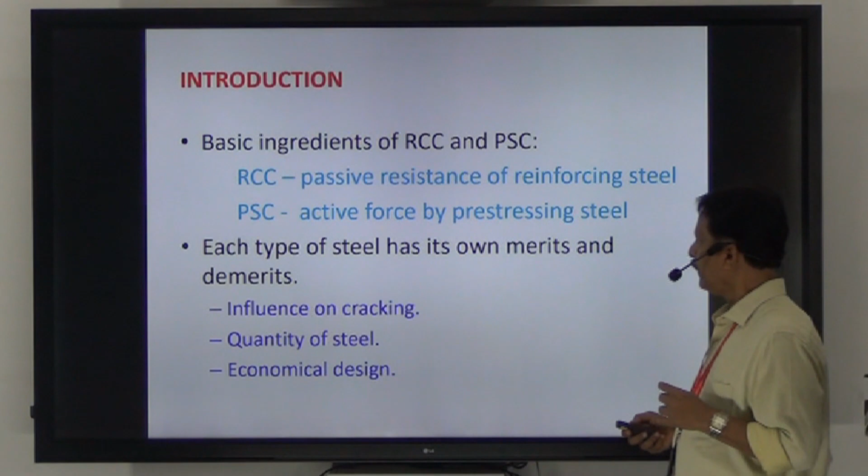Both the steels have their own merits and demerits. The untensioned steel used in RCC is a passive reinforcement.

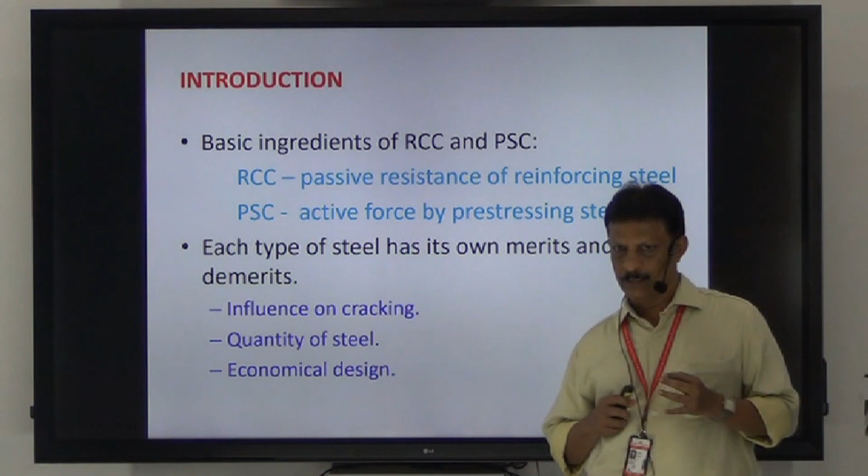Why is it passive? Because that reinforcement in RCC comes into picture only after the cracking of concrete. Till then, it is actually sleeping.

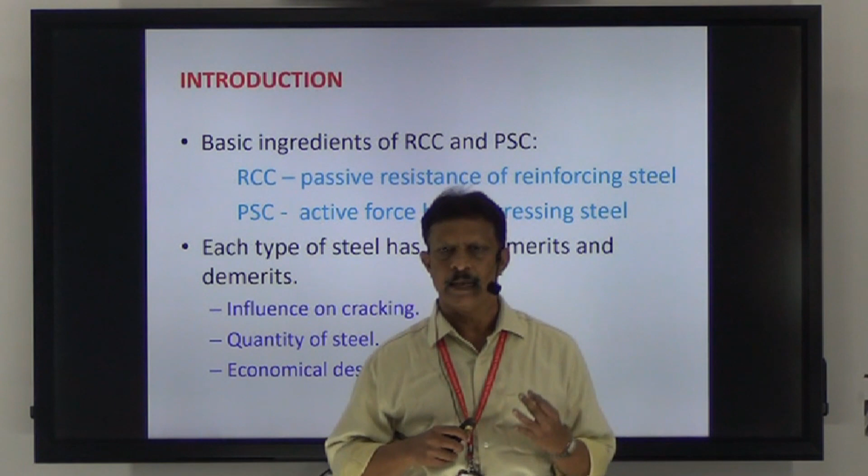But in prestressed concrete, immediately after the transfer of prestressing force to concrete, it is active, maintaining the initially induced compressive stress in concrete to counteract the tension due to external loads.

But each steel has its own merits and demerits with respect to the influence on cracking, quantity of steel, and economical design.

With respect to the influence on cracking, earlier I told you that the untensioned reinforcement used in reinforced cement concrete is actually sleeping till the occurrence of the first crack.

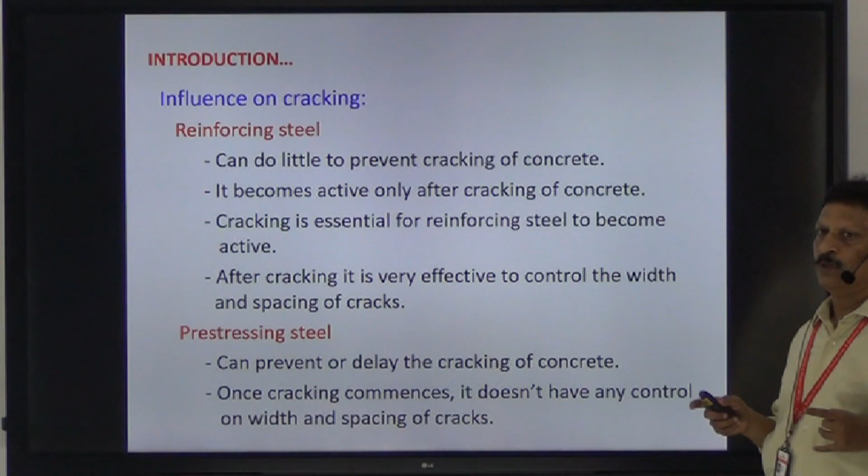So accordingly we can say that the prestressed steel can delay the cracking of concrete. It is either preventing or delaying the cracking, but once the cracking has occurred, it doesn't have any role.

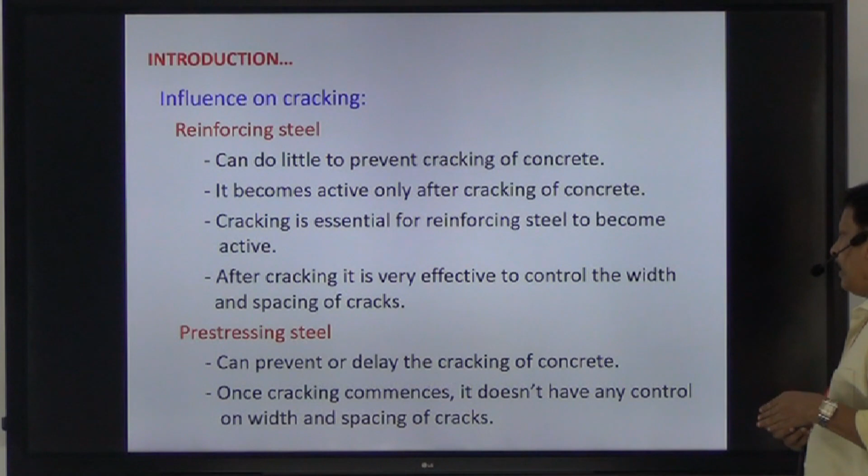It cannot control the width of the crack, nor the spacing of the cracks. That is the role of the reinforcing steel versus the prestressing steel with respect to cracking.

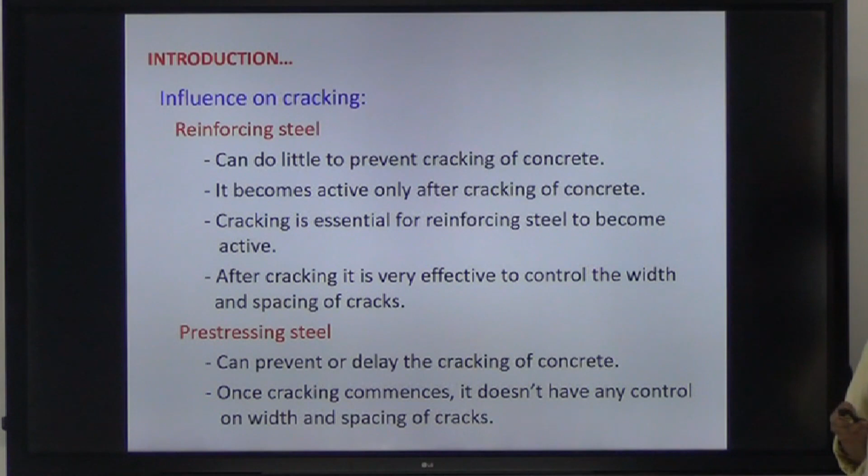Now with respect to excess of steel, any quantity of reinforcement steel can be used in RCC, provided it does not affect the placement and compaction of concrete.

Otherwise we can use any quantity of steel without any harmful effect. At the same time, in prestressing steel, excess of prestressing steel is harmful.

It may be safe in some sense because the prestressing steel induces a compressive stress, and by increasing large quantity of steel, it can increase the initially induced compressive stress.

At the same time, though it increases the stress, we know that at the time of transfer of prestressing force, we are inducing maximum compressive stress at the bottom fiber, and the top fiber is in tension.

If the initially induced compressive stress is more, there is a danger of camber. So from the point of view of deformation, it is harmful, but from the point of view of stress, it is beneficial also.

So it may lead to unacceptable camber, and again the stress at certain sections, that is at the point between the support and the midspan section for a continuous beam, the stresses are changing.

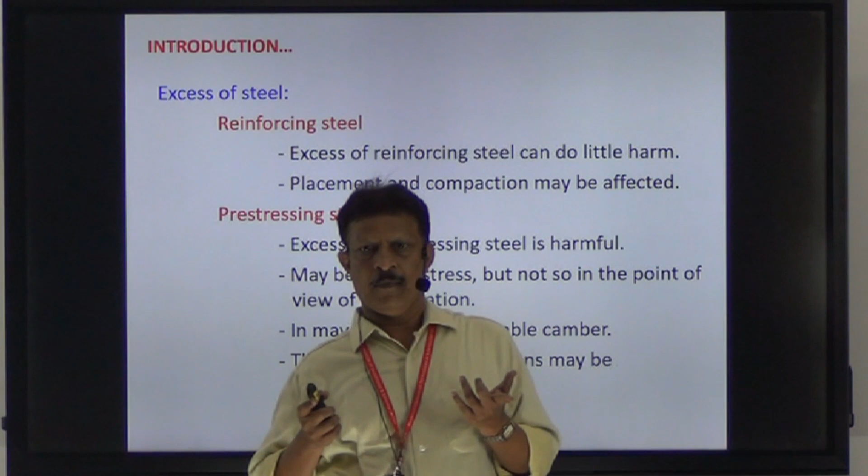It's a sign change of the stresses from compression to tension. So at that particular point, the stress may become a minimum, possibly zero.

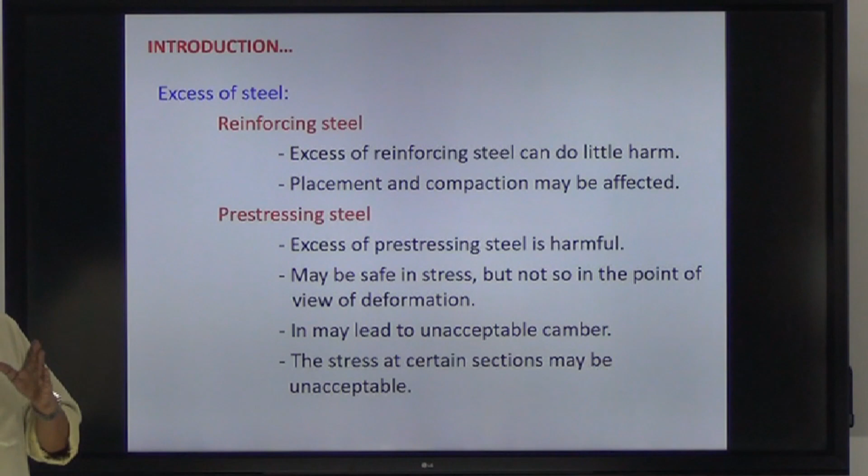At those critical sections, if there is excess of prestressing steel, the excess stress may be dangerous. So that is with respect to the excess of steel.

Then again, with respect to economy, we know that the prestressing steel is costlier than reinforcing steel.

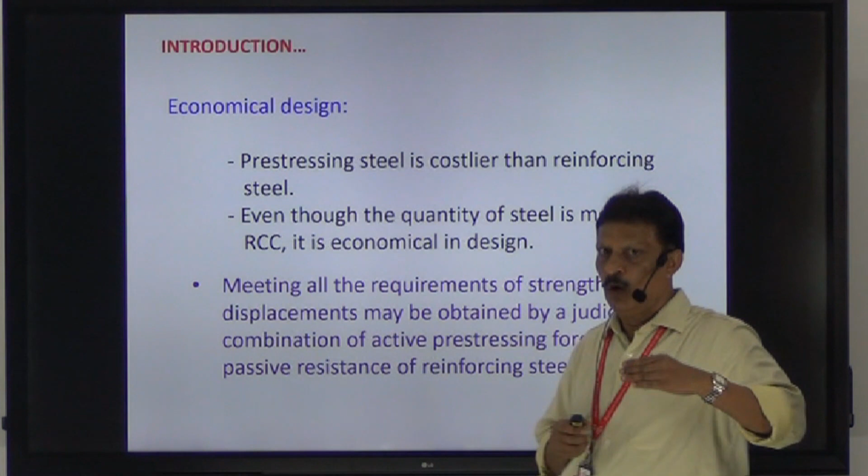In RCC, even though the quantity of steel is more, the cost is less. So RCC is always economical compared to the pre-stressed concrete.

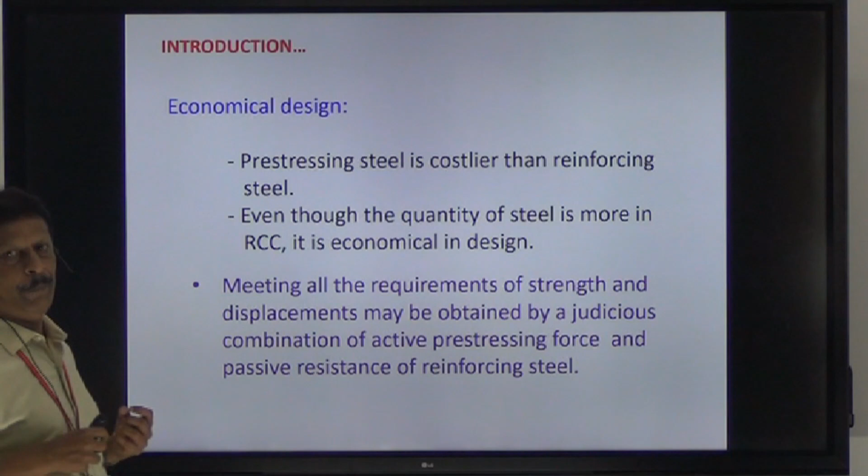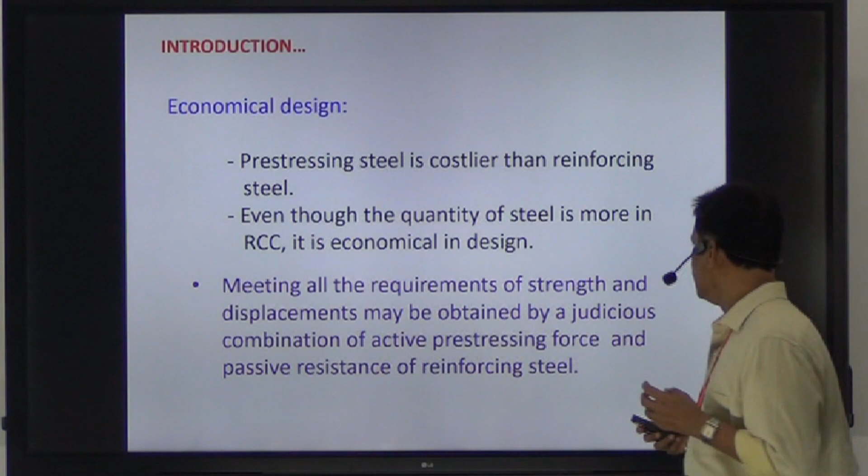Our aim is how to come to a proper combination in the design of a member. We have to take a decision, that is a judicious combination of the active pre-stressing force and the passive resistance of reinforcing steel. That is the most economical one, and that is what is called a pre-stressed concrete member.

As we know, there are a number of types of members: type 1, type 2, type 3, and type 4. Type 1 member means after application of the external load, the bottom fiber stress will be either 0 or compressive. The cross section is fully compressive, and that is type 1 member.

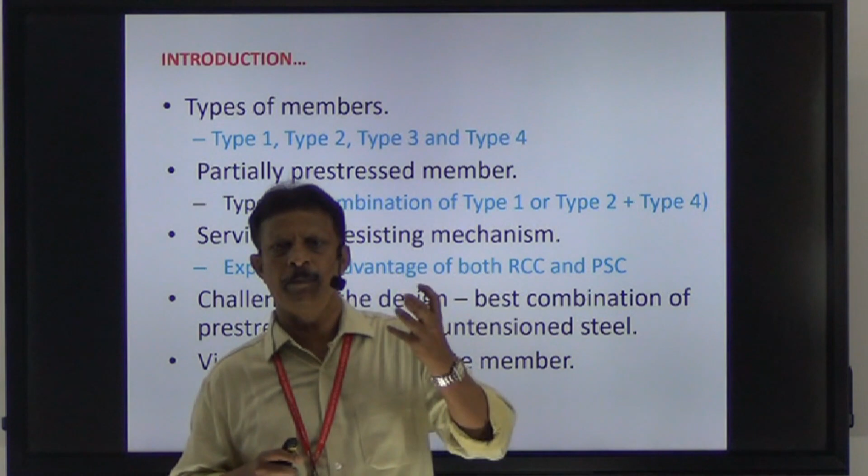In type 2 member, the bottom fiber stress should be equal to 0. In type 3, the bottom fiber has tension, but that tensile stress is within the permissible limit, below or up to the tensile strength of concrete. And type 4 member, that is actually RCC, reinforced cement concrete.

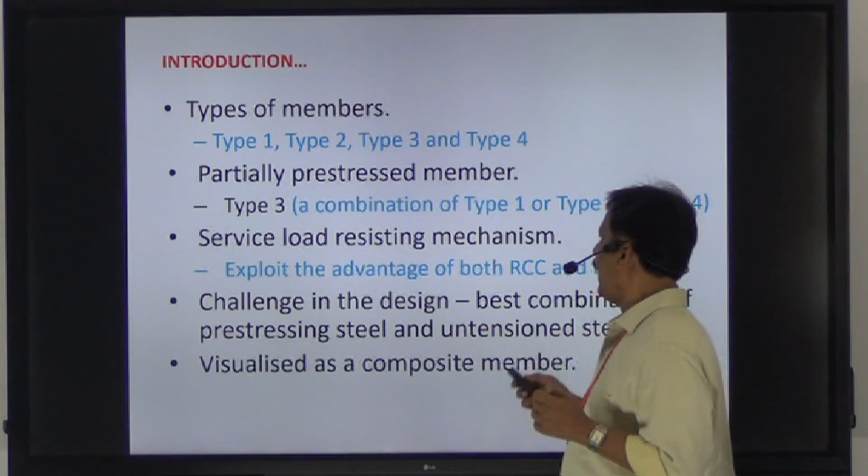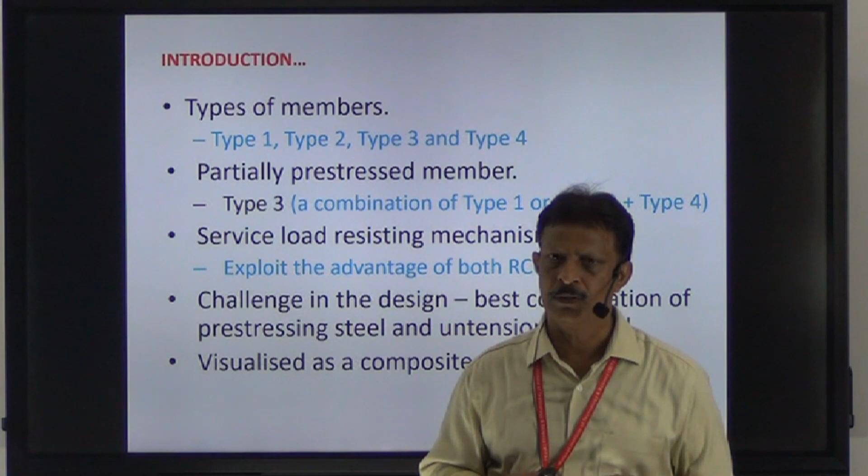Now the partially pre-stressed member is a combination of type 1, type 2, and type 4. It is compressive, and again, if tension is allowed, up to a certain limit, tension is allowed, and at the same time, untensioned reinforcement is also used. So in service load resistant mechanism, it is exploiting the advantages of both RCC and PSC.

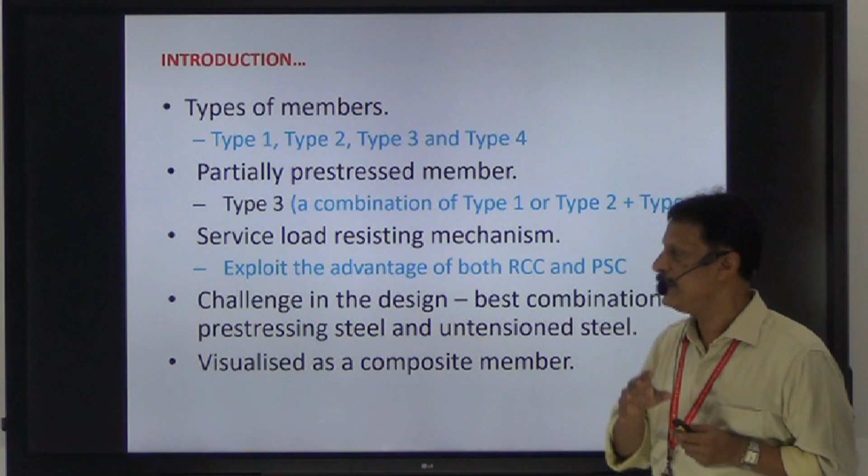The challenge in the design is the best combination of the pre-stressed steel and the untensioned steel, and that is to be done in partially pre-stressed concrete. Again, we are visualizing it as a composite member.

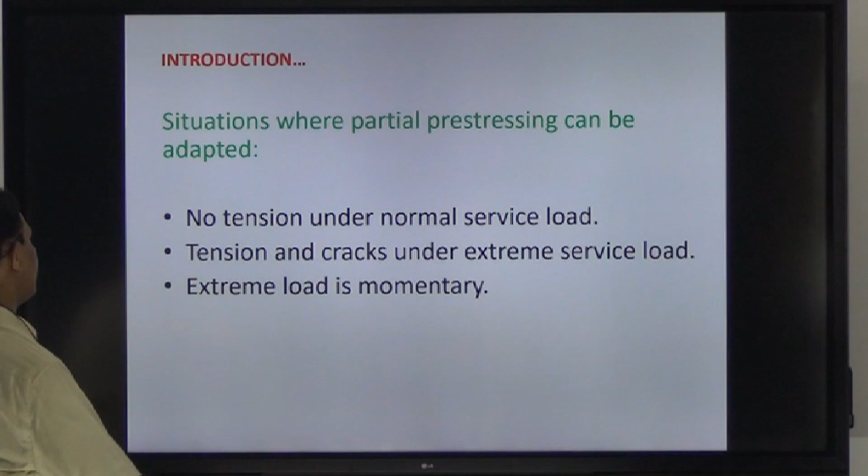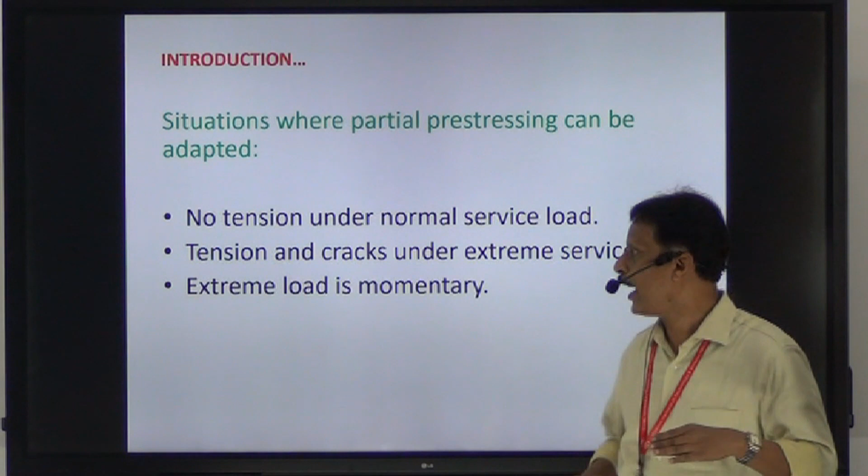These are the situations where partially pre-stressing can be adopted: the situation where there is no tension under service load. Under service load, the member is not subjected to any tensile stress. In that situation, we can adopt this partially pre-stressed concrete member.

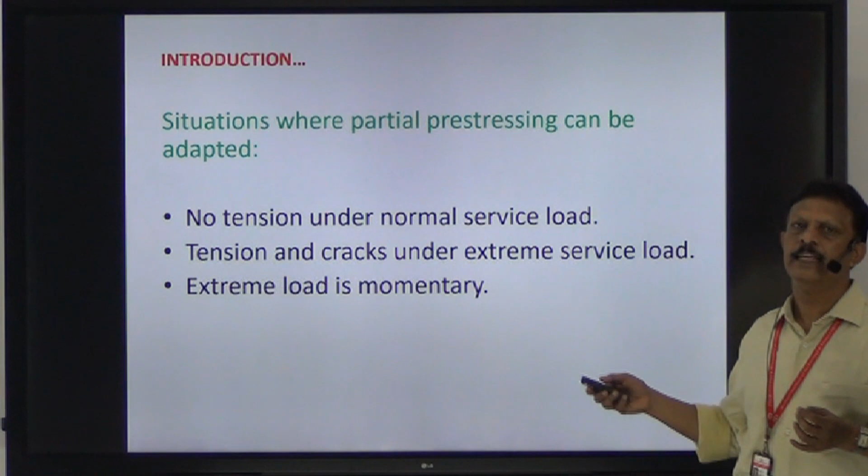Again, tension and cracks under extreme service loads - tension is there under extreme service load. And if that extreme service load is momentary, just for a time, and immediately after that is passed, the beam will come back to its original position and the deformation will come back to its original one. In that case also, this partial pre-stressing is advantageous.

There are two ways for achieving partial pre-stressing. The pre-stressed steels are stressed up to a certain limit only, not up to its full capacity. Usually, the pre-stressing force is applied to a value equal to 60% of FPU, where FPU is the ultimate strength of pre-stressing steel. Only up to 60% we are applying the stress. That is the usual practice.

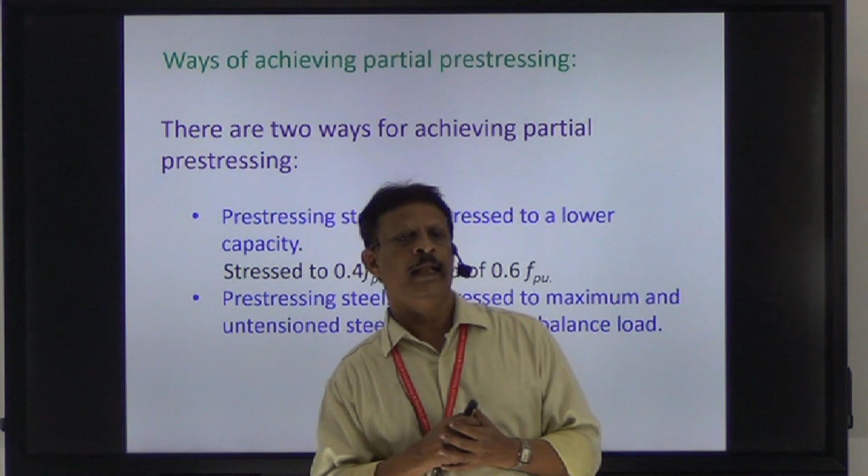Instead of that, we are applying only 40% of that strength, and for the balance, we can provide untensioned steel. That is one way of achieving this partial pre-stressing. The second one is the pre-stressing steels are fully stressed, and that will take care of a portion of the external load, and for the balance, we can provide untensioned steel. So these are the two ways for achieving partial pre-stressing.

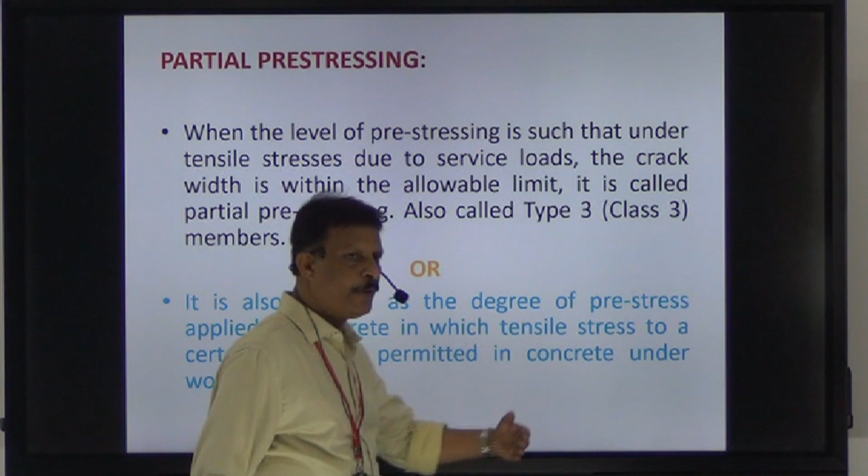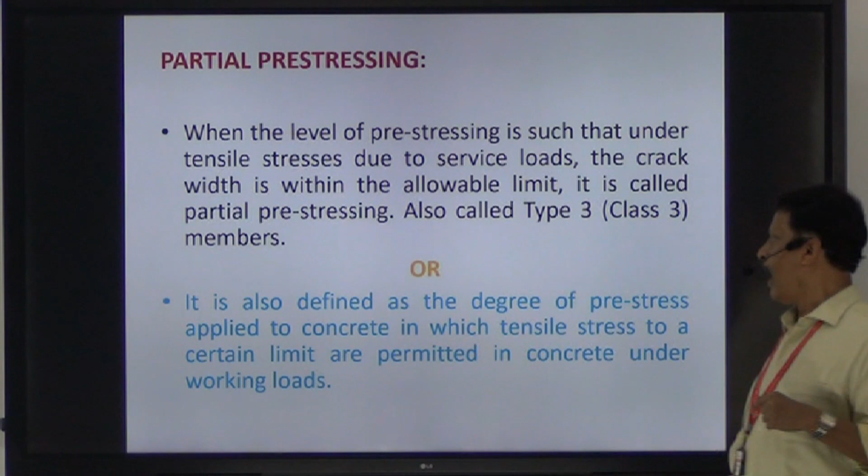Now, this partial pre-stressing we can define like this: when the level of pre-stressing is such that under tensile stresses due to service loads, the crack width is within the allowable limit, it is called partial pre-stressing, also called a type 3 member. We are allowing tension, though that tension should be within the permissible limit. Again, it can be defined as the degree of pre-stress applied to concrete in which tensile stress to a certain limit is permitted in concrete under working loads.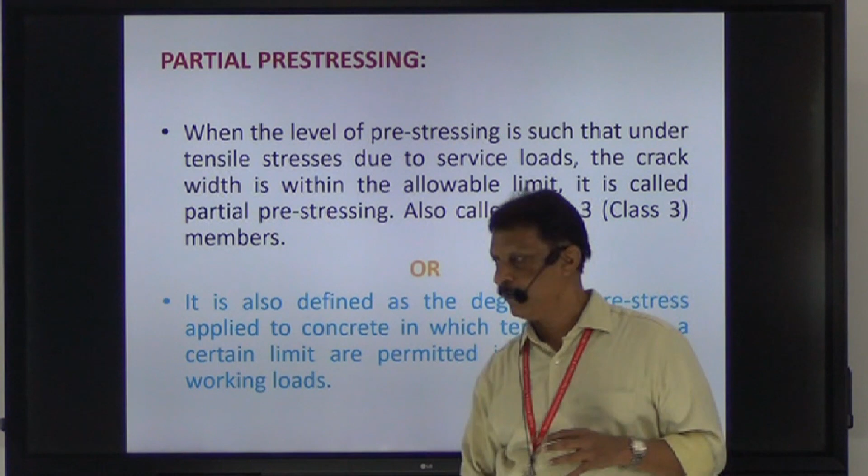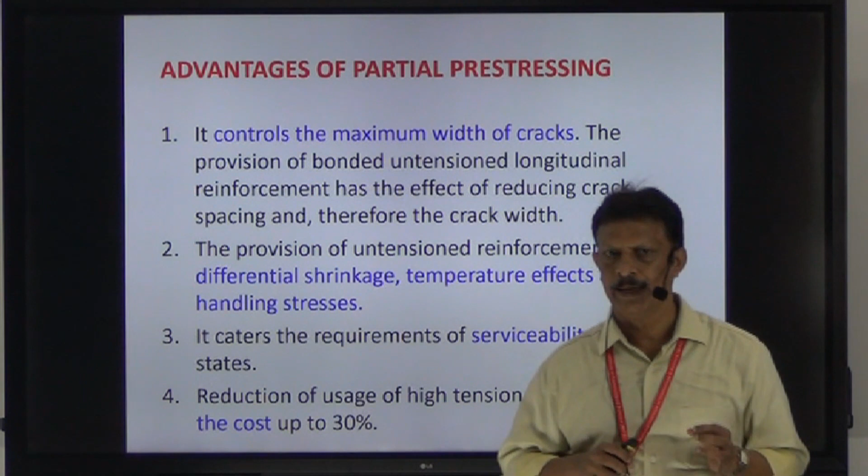These are the two definitions given to partial pre-stressing, and these are the advantages. The first advantage is it controls maximum width of cracks. Already we have seen that in RCC, the untensioned reinforcement will come into picture after the concrete cracks. Once it is cracked, it has a major role in controlling the spacing of the crack and the width of the crack.

In partially pre-stressed members, since we are using untensioned reinforcement, it will control the width and spacing of cracks, reducing the spacing, and therefore the crack width also is reduced. So that is the first advantage, which controls the maximum width of cracks.

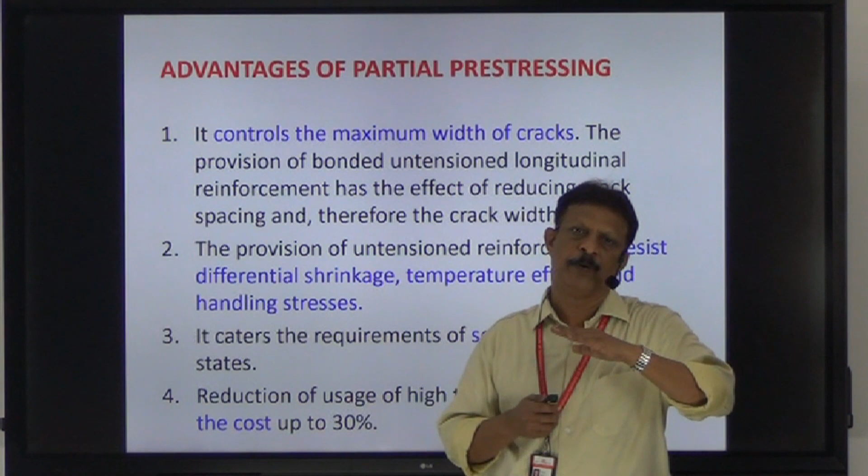Since we are using untensioned reinforcement, it is effective in resisting differential shrinkage, temperature effects, and handling stresses. Because of temperature, stresses will be induced, and these stresses are mostly peripheral. Only if you are providing reinforcement on the periphery of the member will those stresses be taken care of.

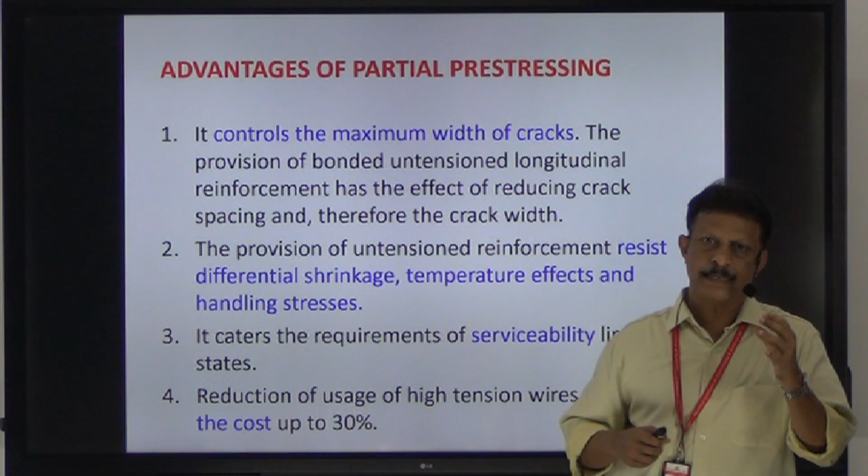If it is a fully pre-stressed member, the pre-stressing steel is usually provided at the center, or at a certain eccentricity from the center, so at the periphery there is no reinforcement. Since partial pre-stressing uses untensioned reinforcement on the periphery, it is effective in resisting temperature effects, differential shrinkage, and stresses induced by handling. That is the second advantage of partially pre-stressed members.

Again, the camber, the serviceability limit states, are also satisfied. The camber and deformation can be controlled because of the use of untensioned reinforcement.

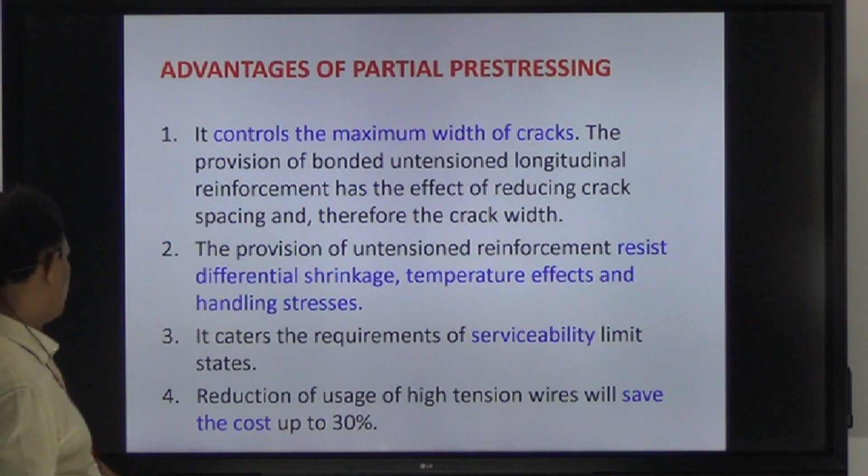The cost also can be reduced in partial pre-stressing. Since we are using untensioned reinforcement, the total cost can be reduced by up to 30%.

It is ductile because of the usage of untensioned reinforcement compared to a fully pre-stressed one, that is, using only pre-stressing wires. We can see that partially pre-stressed members are ductile.

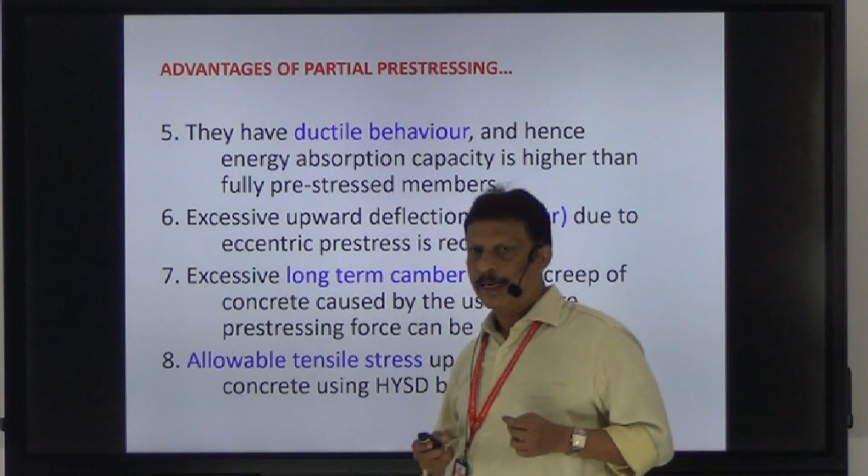The excessive upward deflection, also called camber, can be reduced. And the long-term camber, because of creep of concrete—creep meaning the change in dimensions because of a constant load.

Heavy pre-stressing forces, if present for long periods, will cause creep. This creep effect can be reduced because, since it is partially pre-stressed, the quantity of steel is less compared to a fully pre-stressed one, and because of that, the long-term camber can also be reduced.

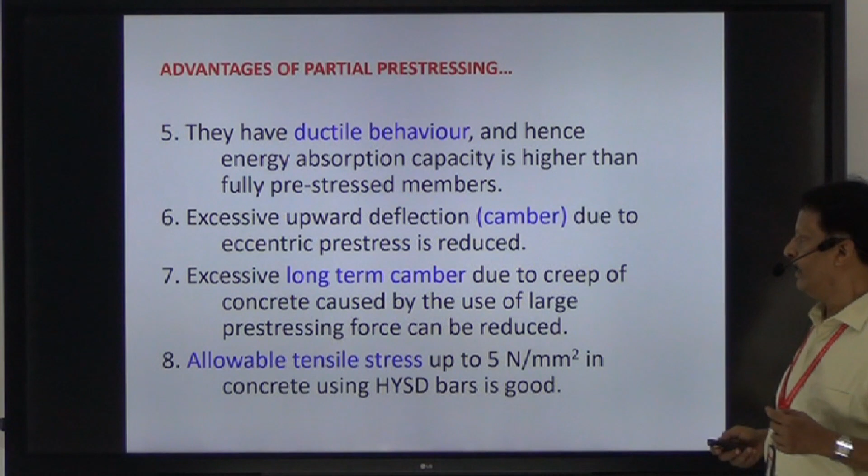Also, a stress of up to 5 Newton per millimeter square can be induced by the use of untensioned reinforcement. These are the advantages of partial pre-stressing.

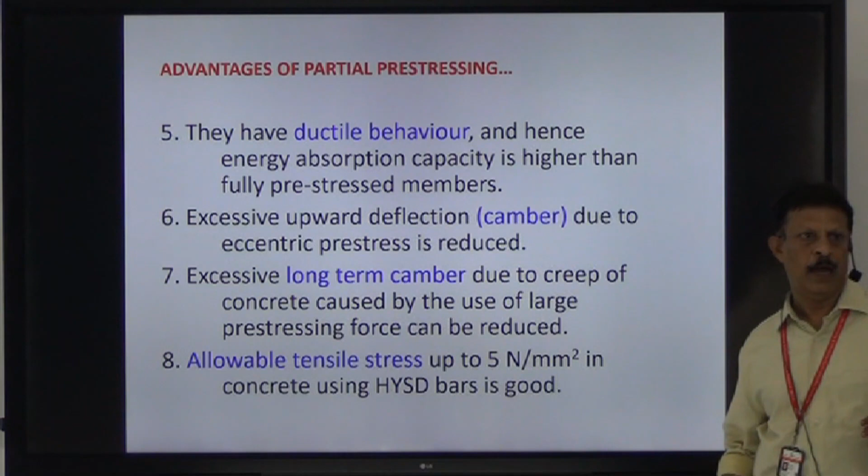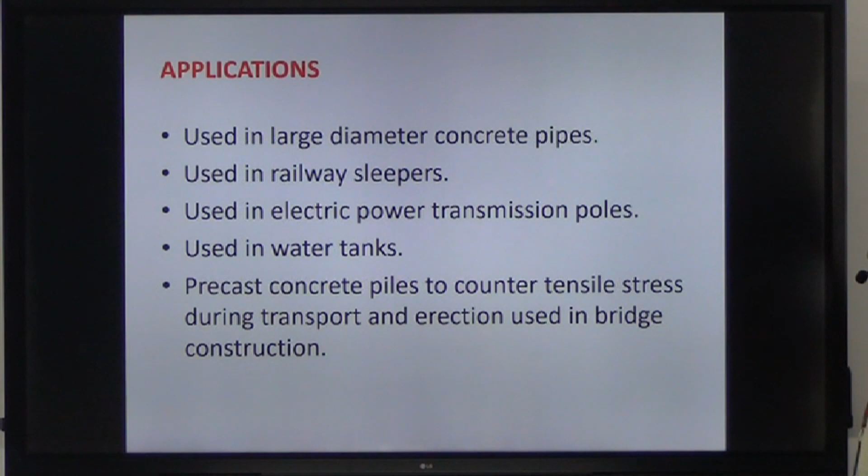Now we can see the applications. It has a very wide application. Partial pre-stressing can be used in large diameter concrete pipes, railway sleepers, and electric power transmission poles. All these poles are designed as partially pre-stressed members.

For water tanks, especially circular water tanks, its use is very advantageous because the purpose of a water tank is to store water, and if cracks are there, leaks will occur, and the purpose won't be served. In a fully pre-stressed body only compressive stresses are present, whereas in a partially pre-stressed body untensioned reinforcement can also be used.

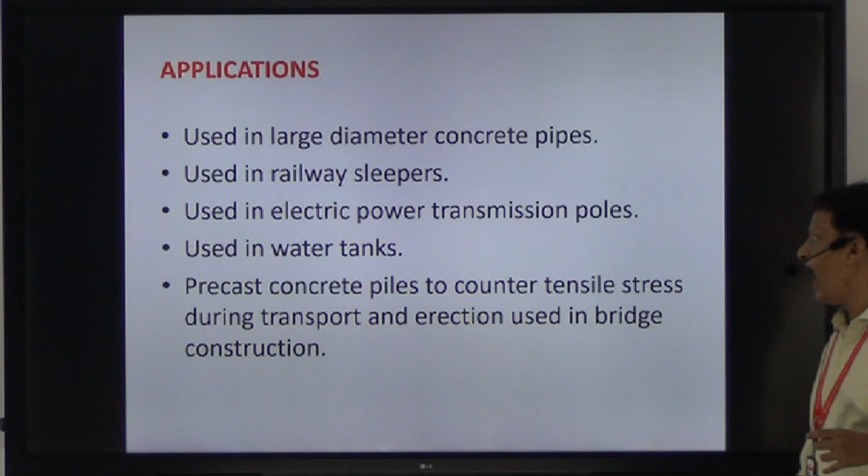Again, for piles, at the time of transporting them, there are chances of inducing stresses. These stresses can be reduced by using untensioned reinforcement in piles, so for the construction of piles also we can use this. These are the applications of partial pre-stressing.

We are designing these partially pre-stressed members to resist external loads. While applying the external loads, a part of the load is resisted by the pre-stressing wires, and the other part is resisted by the untensioned reinforcement. The extent of partial pre-stressing depends on the manner in which the applied moment is resisted by the pre-stressing steel and the reinforcing steel, and to quantify or measure the extent of partial pre-stressing, some definitions are given.

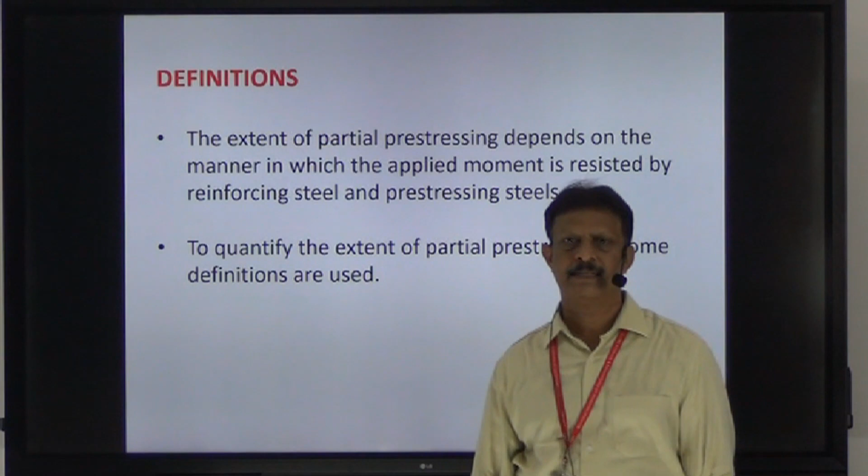From these definitions, we can measure the extent of partial pre-stressing. One is the pre-stressing index, which is the ratio of the ultimate strength of pre-stressing steel to the ultimate strength of total steel in the tension zone. In the tension zone, in addition to pre-stressing steel, untensioned reinforcement is also present, so we calculate the ultimate strength of the steel provided in the tension zone, and the ratio of the ultimate strength of pre-stressing steel to the total ultimate strength is called the pre-stressing index.

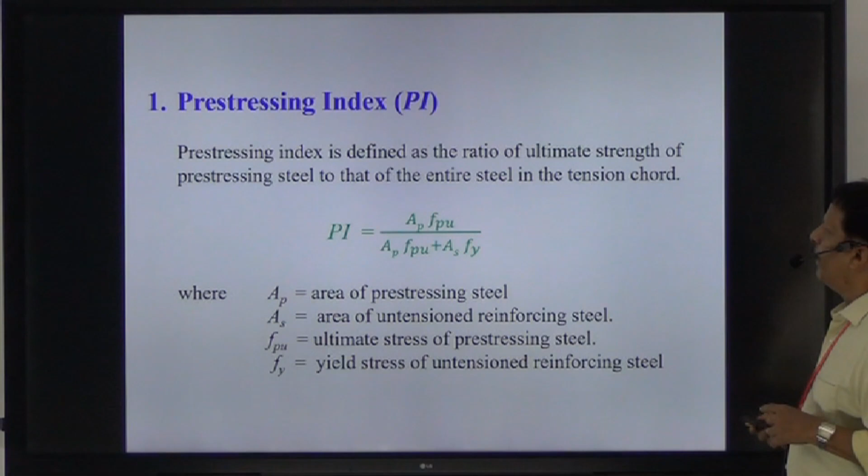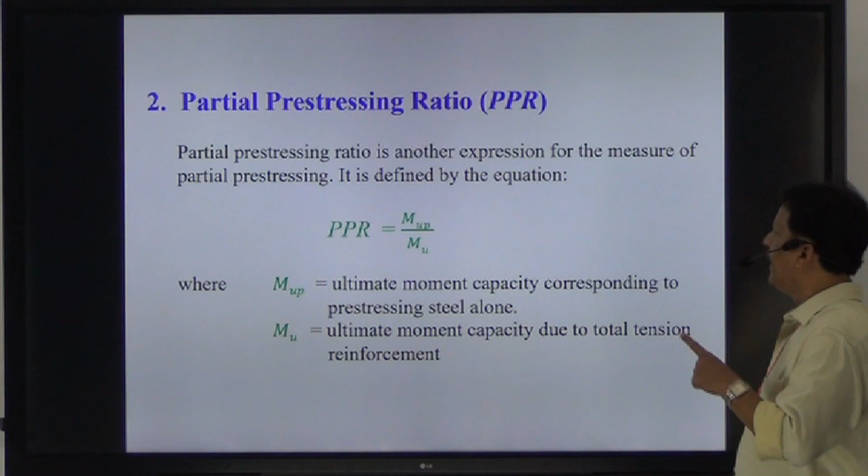The second one is the partial pre-stressing ratio, which is the ratio of MUP divided by MU, where MUP is the ultimate moment capacity corresponding to pre-stressing steel only, and MU is the ultimate moment capacity due to total tension reinforcement.

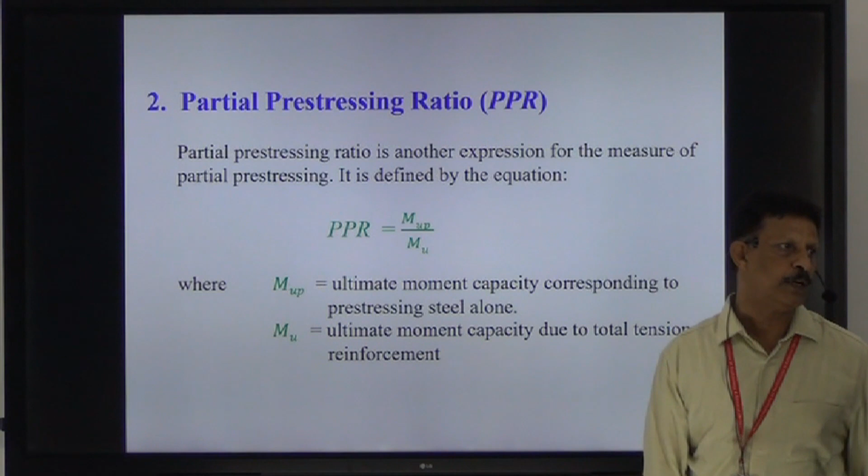So that ratio is called a partial pre-stressing ratio, that is MUP divided by MU.

And the third definition is degree of pre-stress. The degree of pre-stress is the ratio of MDC divided by MW, where MDC is the decompression moment and MW is the service load moment.

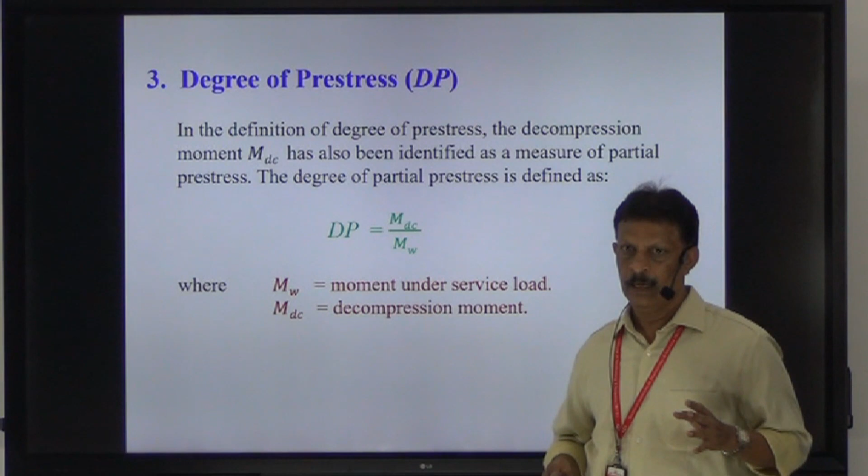Then what is decompression moment? Decompression moment means, if we are taking a pre-stressed concrete member subjected to a pre-stressing force at an eccentricity E, and in this member if you are calculating the bottom fiber stress, that will be equal to P by A, that is the direct stress because of pre-stressing force, then plus the stress due to the eccentricity. Because of the eccentricity, there is a moment, that is P into E, that will induce a stress at the bottom equal to M divided by Z, that is P into E divided by Z.

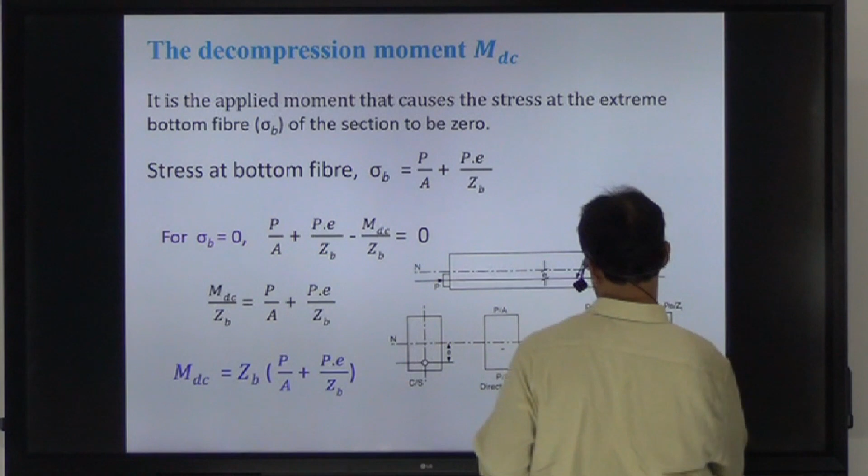Therefore, the total stress which is compressive at the bottom fiber of the beam is P by A plus P into E divided by Z. Z is ZB because we are considering the bottom fiber. And that is the initially induced compressive stress at the bottom of the beam.

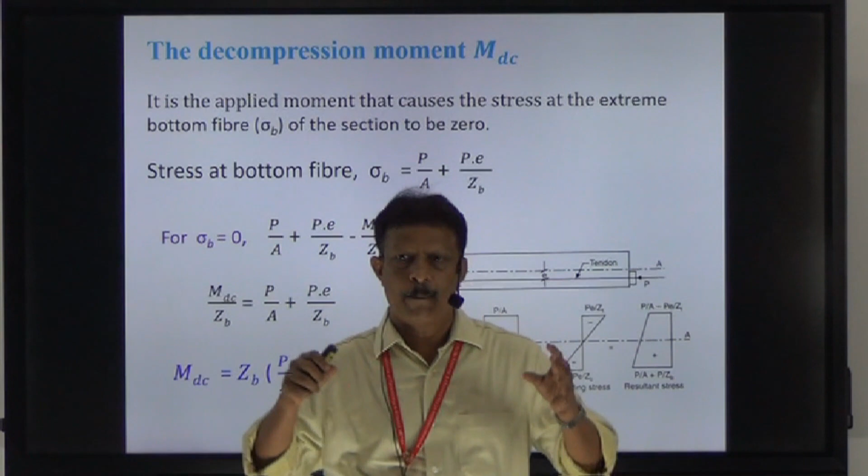Then we are applying the external load. Because of the external load, tension will be induced at the bottom fiber. As the external load is increased, the tensile stress is also increasing. At a certain point, the stress at the bottom fiber is equal to 0, that is the initially induced compressive stress is balanced by the tensile stress induced by the external load. Then the quantity of moment or the external load which is required to produce zero stress at the bottom fiber...

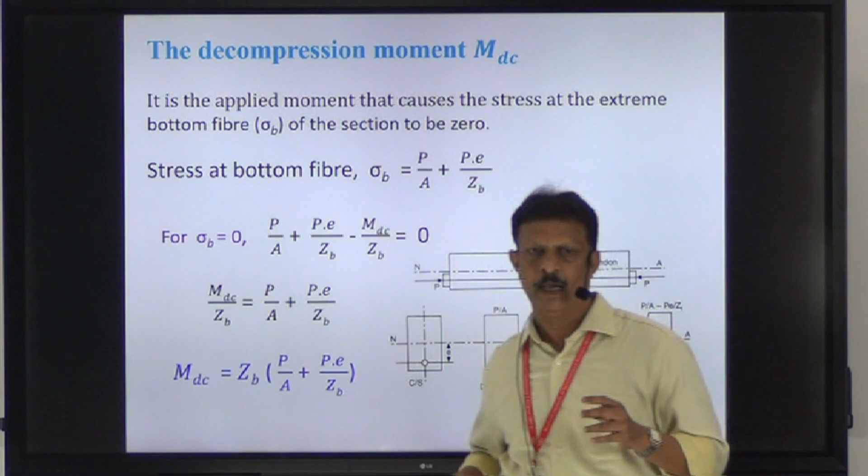...that is the decompression moment. That is the quantity of moment, or the moment corresponding to the load, to produce zero stress at the bottom fiber of the beam member, that is called the decompression moment.

So we can write the bottom fiber stress as P by A plus P into E by Z. Then for sigma B, for bottom fiber stress equal to 0, that is this plus this, this is the total moment. Now we are equating this to 0, and for that, the external moment required is MDC. Therefore, P by A plus P into E divided by ZB is equal to MDC divided by ZB. Then MDC is equal to this quantity multiplied with ZB.

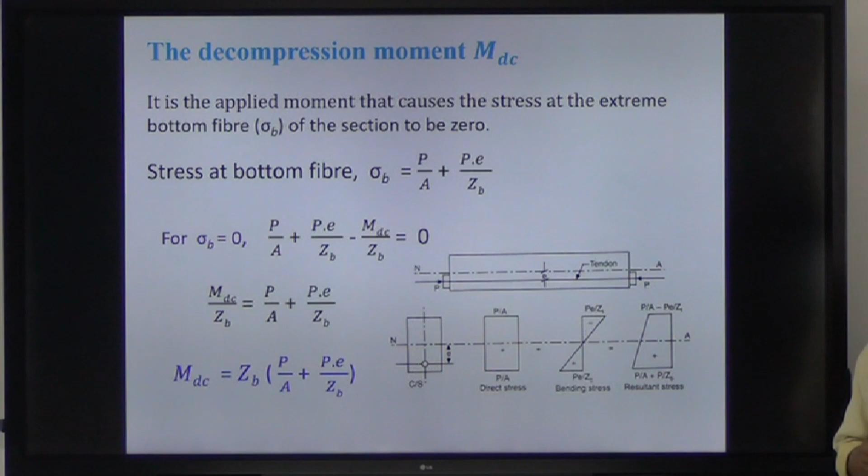Then this MDC, that is called the decompression moment, that is the applied moment that causes the stress at the extreme bottom fiber section to be 0. That is the decompression moment. Now, the ratio of that decompression moment to the service load moment is called the degree of pre-stress. These are the three definitions.

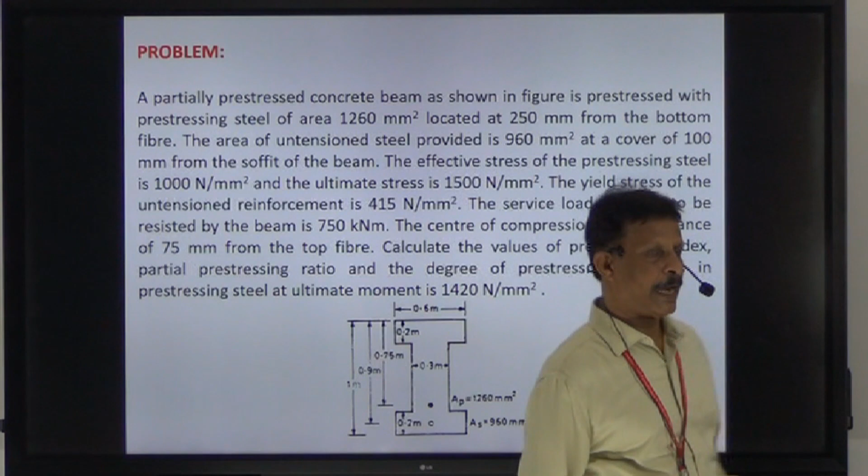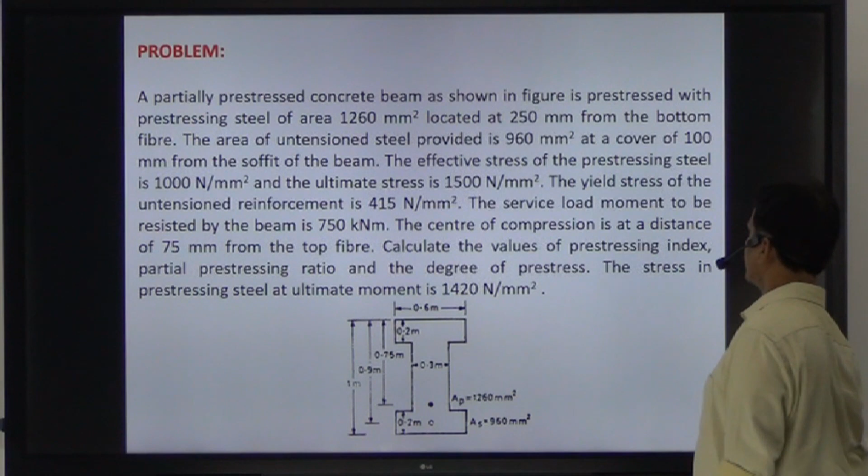Now we can come to see a problem for the calculation of these values. The problem: a partially pre-stressed concrete beam, as shown in figure, is pre-stressed with pre-stressed steel of area 1260 millimeter square, located at 250 millimeter from the bottom fiber. The area of untensioned steel provided is 960 millimeter square at a cover of 100 millimeter from the soffit of the beam. The effective stress of the pre-stressed steel is 1000 Newton per millimeter square.

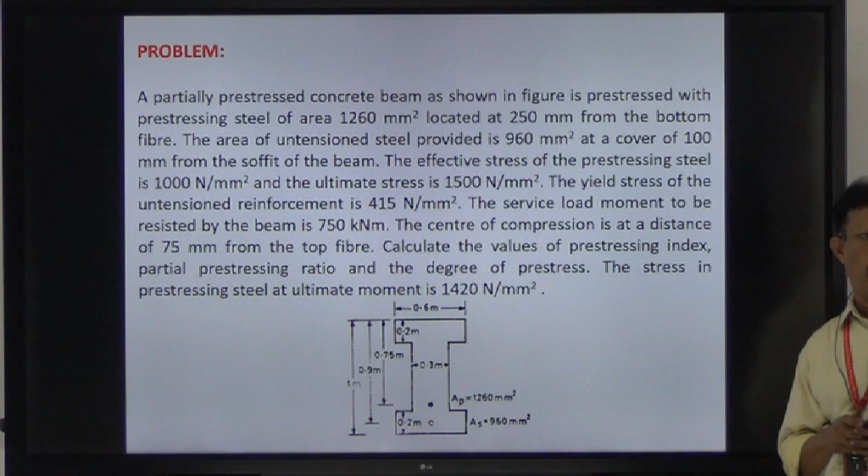And the ultimate stress is 1500 Newton per millimeter square. The yield stress of the untensioned reinforcement is 415 Newton per millimeter square. The service load moment to be resisted by the beam is 750 kilonewton meter. The center of compression is at a distance of 75 millimeter from the top of the beam. Calculate the values of pre-stressing index, partial pre-stressing ratio, and the degree of pre-stress.

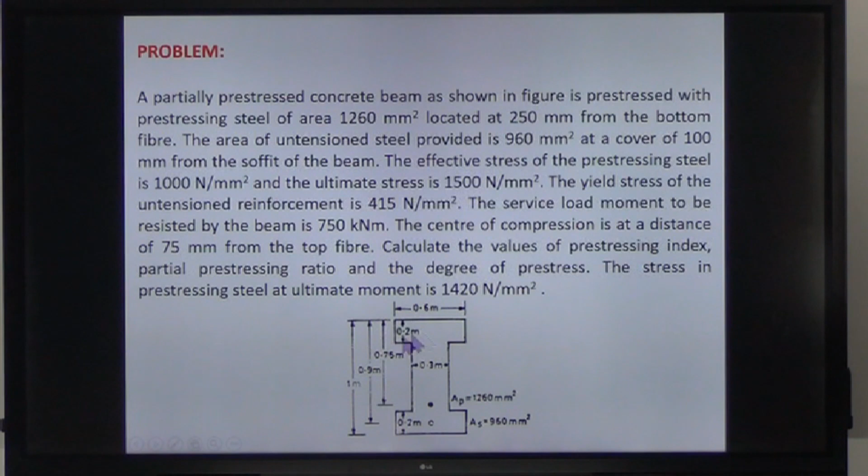The stress in pre-stressing steel at ultimate moment is 1420 Newton per millimeter square, and this is the beam given. This beam is having a total depth of 1 meter, and these are the dimensions. It's a symmetrical beam, symmetrical I section. Now we can see how to solve this problem.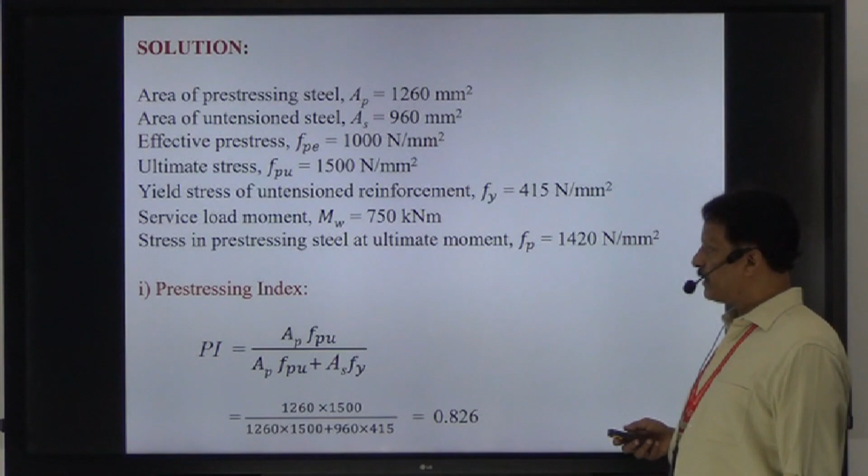These are the data given. Area of pre-stressed steel is equal to 1260, and the area of untensioned steel is 960 millimeter square. The effective pre-stress is 1000. Ultimate stress of pre-stressed steel is 1500 Newton per millimeter square. Yield stress of untensioned reinforcement Fy is equal to 415 Newton per millimeter square. Service load moment is 750 kilonewton meter, and the stress in pre-stressed steel at the ultimate moment is equal to 1420 Newton per millimeter square.

We have to calculate the pre-stressing index first, then the partial pre-stressing ratio and the degree of pre-stress.

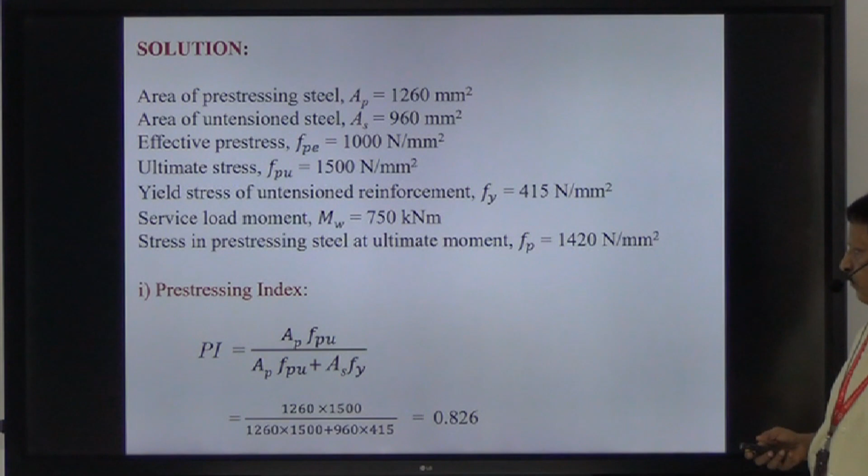For the calculation of the pre-stressing index, this is the ratio. Pre-stressing index is equal to APFPU divided by APFPU plus ASFY, where APFPU is the ultimate strength of pre-stressed steel only, and that is equal to area into stress, the ultimate force, that is area into stress.

So area AP is given as 1260, and the stress at ultimate load is given as 1500. So 1260 into 1500 is equal to the ultimate strength of pre-stressed steel.

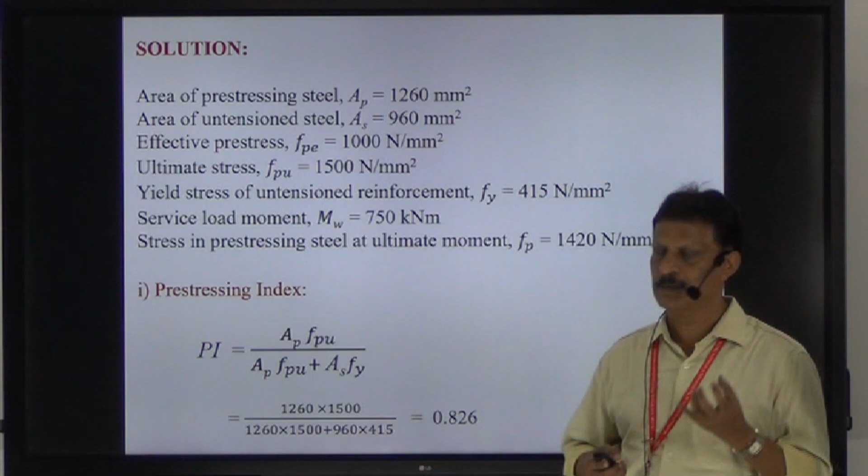That divided by the total strength, pre-stressed steel plus untensioned steel. For the pre-stressed steel, it is same, that is 1260 into 1500, plus for untensioned reinforcement, the area is 960 and the yield strength is equal to 415. So this pre-stressing index is equal to 0.826.

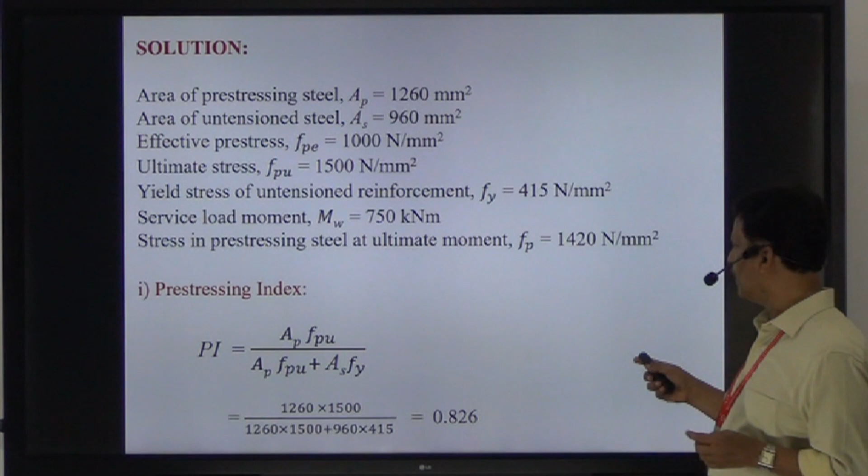Simply, very easily we can calculate the definition, that is these values. The pre-stressing index is equal to 0.826.

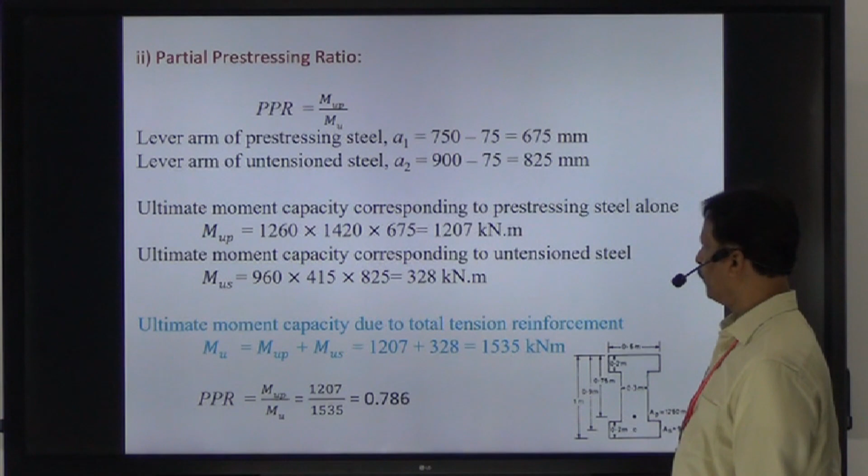Now we can see the partial pre-stressing ratio, that is the ratio of MUP divided by MU. MUP is the ultimate moment capacity corresponding to pre-stressing force, pre-stressing steel only, and MU is combining the pre-stressing steel and the untensioned reinforcement. Moment MU is equal to force into lever arm.

The force is equal to area into stress, that multiplied with the lever arm. Lever arm means the distance from the center of the pre-stressed steel to the center of compression.

In the problem, it is given that the center of compression is at a distance of 75 millimeter from the top fiber, and the effective depth, that is the total depth, is equal to 1 meter. From 1 meter, the cover to the pre-stressed steel from the bottom is 250.

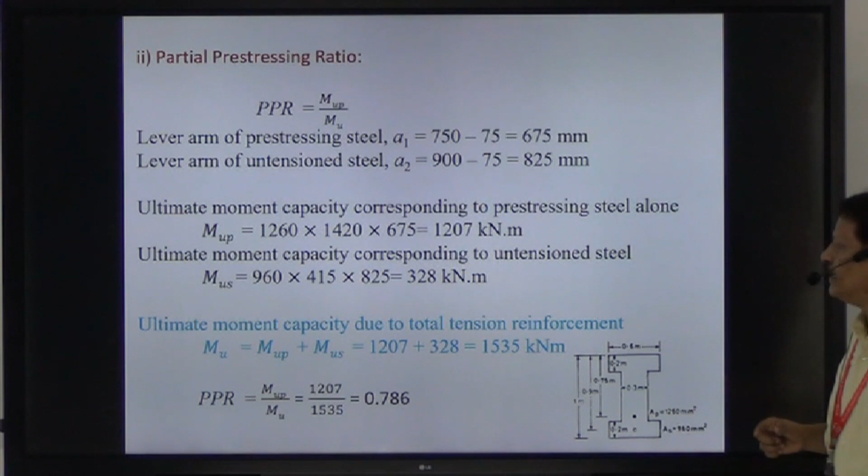So 1000 minus 250 is equal to 750 millimeter, and from that 750 millimeter, the top cover is given as 75 millimeter. So 750 minus 75 is the lever arm for pre-stressing steel.

Similarly, for the untensioned reinforcement, the effective depth is 900 minus the center of compression, 75 millimeter, that is 825 millimeter. Therefore, the ultimate moment capacity corresponding to pre-stressing steel alone is equal to the force 1260 into 1420.

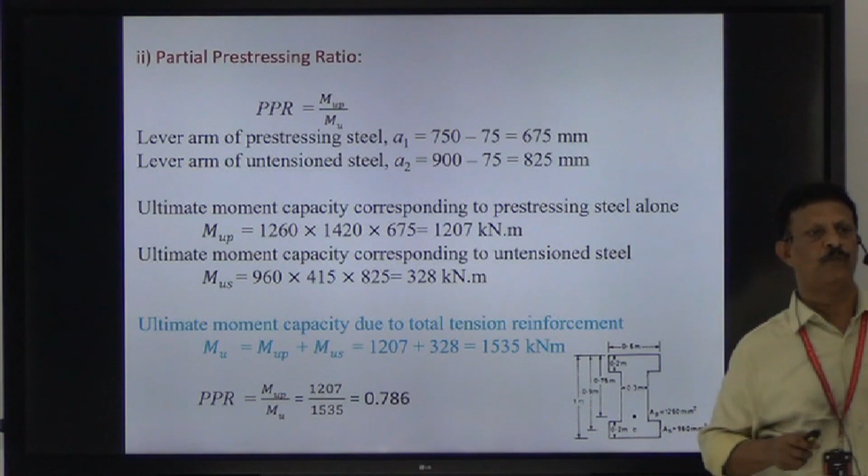Here it is given that the stress at failure is equal to 1420. So we are taking the stress as 1420, that multiplied with the lever arm, 675, is 1207 kilonewton meter. Then MU is the combination of pre-stressing steel and the untensioned steel.

For untensioned steel, the moment is equal to force into lever arm. The force is equal to 960 into 415, the total force, that multiplied with the lever arm for untensioned steel, 825, is equal to 328 kilonewton meter.

Now, the total ultimate moment capacity due to total tension reinforcement, that is the pre-stressing steel plus the untensioned reinforcement, is equal to 1207 plus 328, equal to 1535.

Therefore, the partial pre-stressing ratio is equal to MUP divided by MU. MUP is equal to 1207, MU is the combination, that is equal to 1535, giving 0.786. That is the partial pre-stressing ratio.

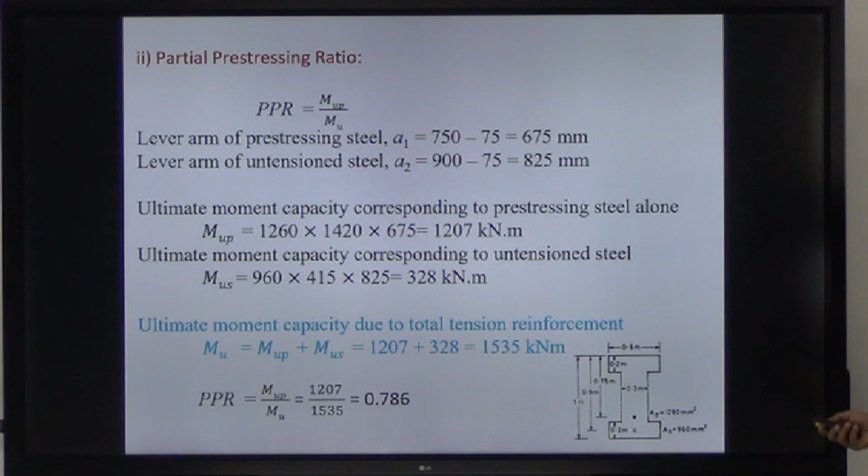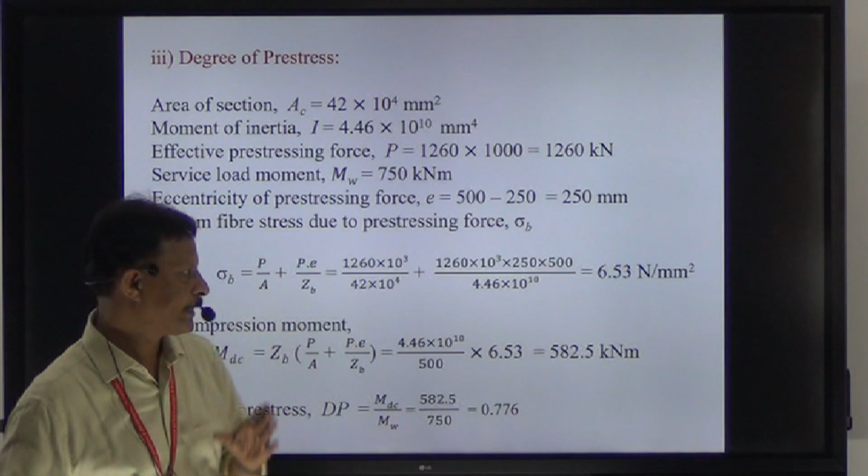Then there is one more ratio, that is the degree of pre-stress, equal to MDC divided by MW. MW is the service load moment that is given, that's given as 750. Now we have to calculate MDC.

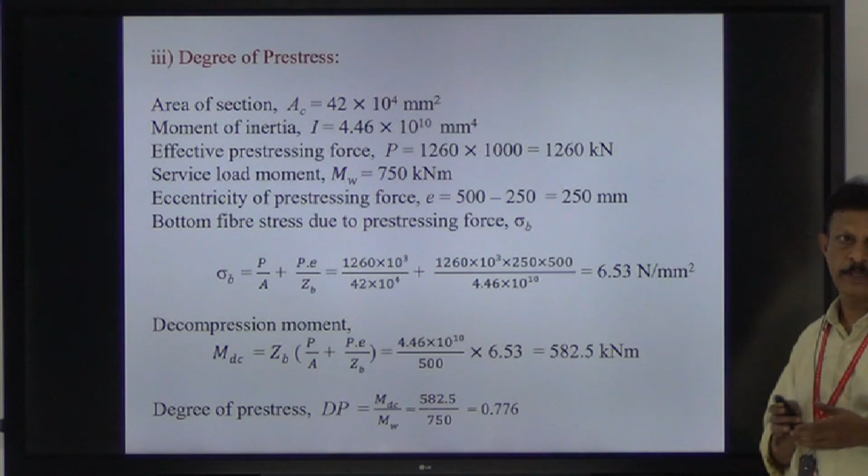MDC means the moment corresponding to zero stress at the bottom fiber. For the calculation of that, we need the area of the section, which we can calculate, and the moment of inertia also we can calculate. The effective pre-stressing force is the area into stress.

Then the service load moment is given. Eccentricity of the pre-stressing force is equal to 500 minus 250, which is 250 millimeter. Then the bottom fiber stress is equal to P by A plus P into E by ZB, where ZB is equal to I divided by Y.

Towards the bottom fiber, Y is equal to 500, giving 6.53. Therefore, the decompression moment is equal to this quantity multiplied with ZB, where ZB is equal to I divided by Y.

This gives 582.5 kilonewton meter. Therefore, the degree of pre-stress is equal to MDC divided by MW. MDC is 582.5, MW is 750, giving 0.776.

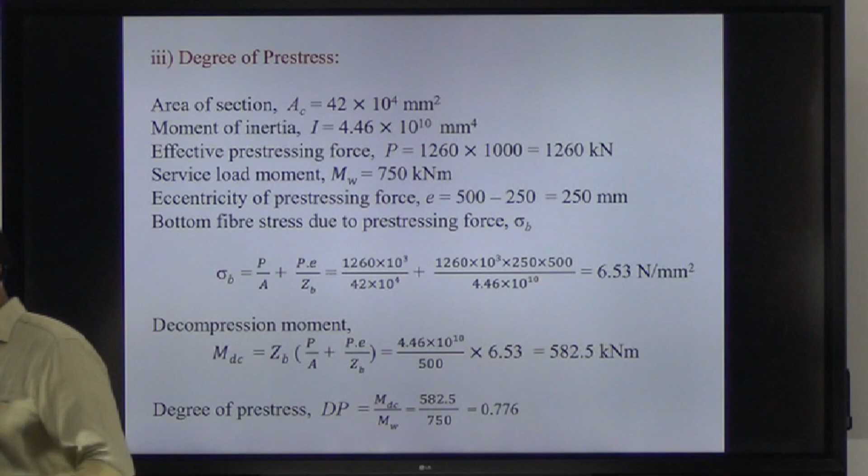So these are the calculations for this problem, for the calculation of the degree of pre-stress, partial pre-stressing index, and pre-stressing ratio. So with this, I come to the end of this portion. Thank you.